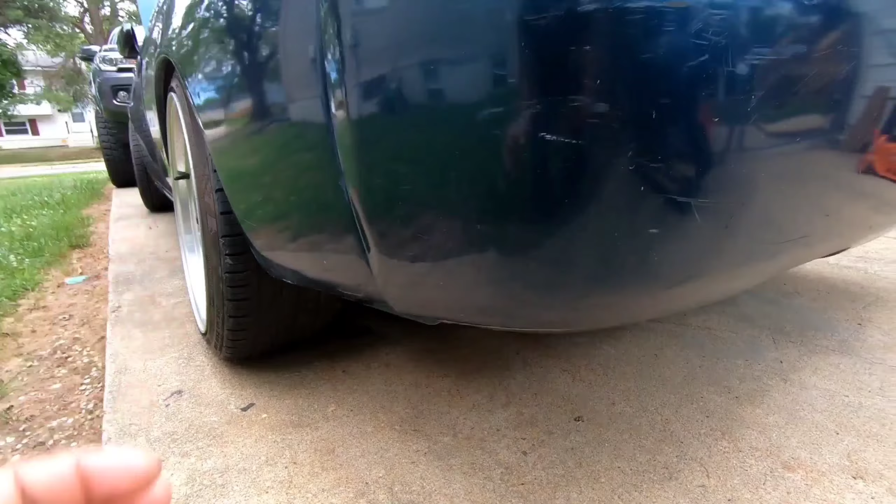All right, so back to the 240. I actually need to get this thing rolling already because I haven't touched this car in about a month, it feels like. But I'm gonna go ahead and work on getting the rear subframe out. Once I get the rear subframe out, drive shaft disconnected and all that good stuff, I can work on that, and then we'll focus on this engine.

I haven't put the front end back together yet just because I'm kind of unsure what I want to do as far as the bumper, getting it painted, getting it replaced. The lip is definitely getting painted. I've been dragging my feet on that, but it's getting done. But like I said, today we're going to worry about the subframe.

I want to get that subframe out, stripped down as good as I can, or scuffed up, then POR-15. I'm not powder coating it. I was considering it, but I'm just against that right now just because I don't want to have to deal with taking it anywhere and waiting on somebody else to get it done.

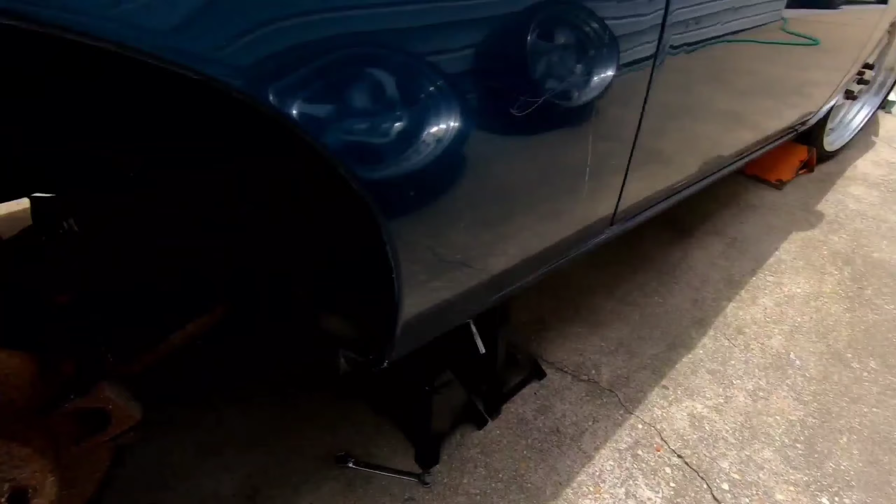All right, both wheels are off. We're going to have to disconnect this. Well, I already did it actually. This parking brake cable has come off because this caliper has come off. Should be free now. There we go. And you're not supposed to let this hang, but I don't care about this brake line or this caliper, so it's gonna hang. This is gonna hang out there. If I need to move it around more, I'll figure it out when I get underneath the car.

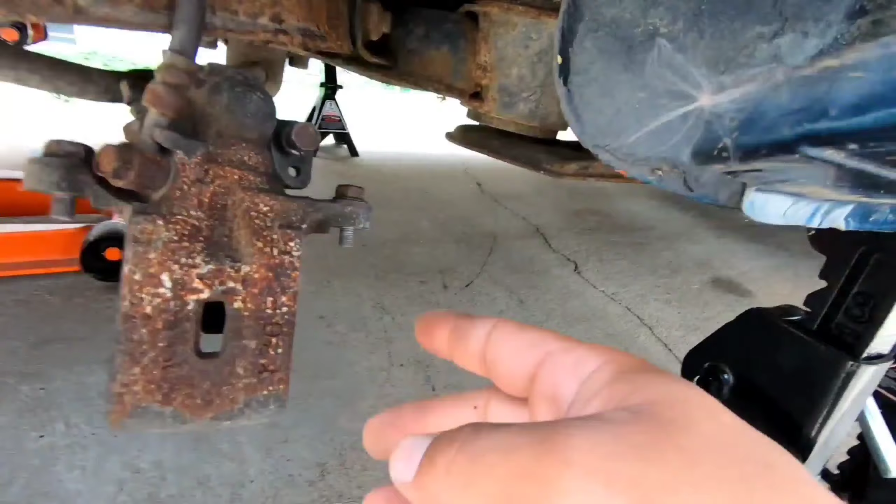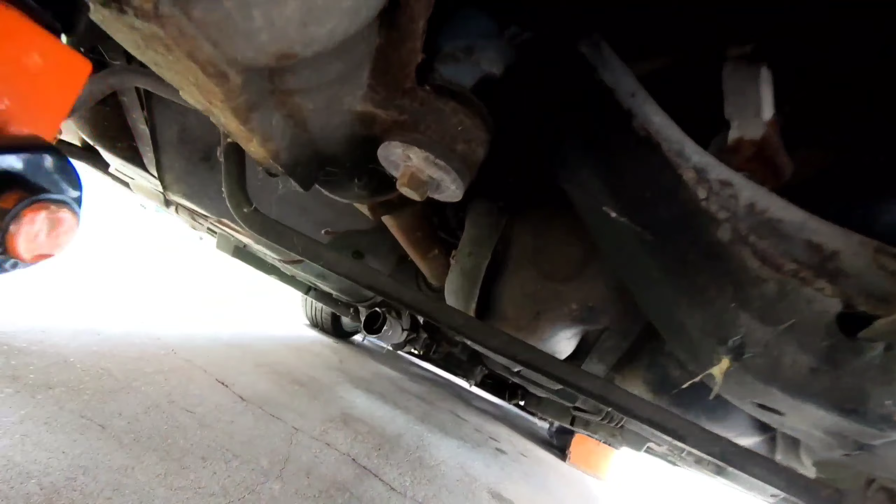But it should be this bracket right here, bolt in the rear, this one right here, and the same thing on the other side and up front, and then undo the shocks down here, and the whole thing should come down. Oh, and of course I have to disconnect the drive shaft up here, but we'll do that last. I'm gonna do everything else in the back first. And everything's juiced up.

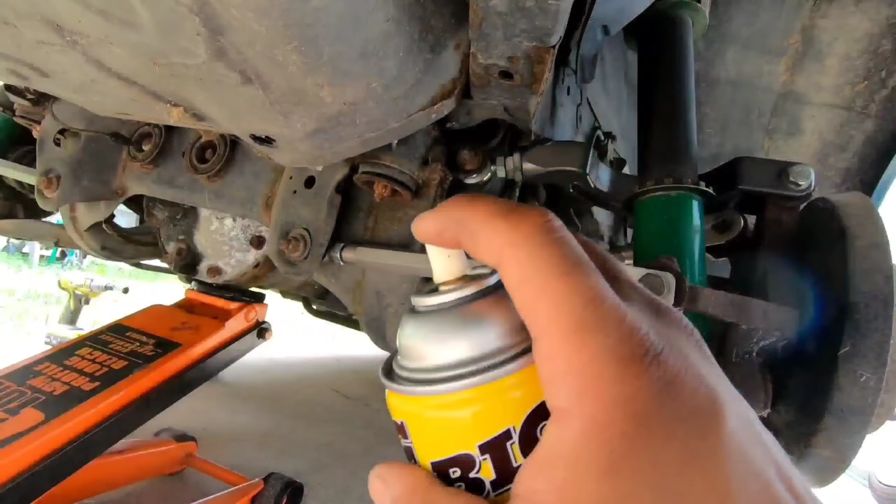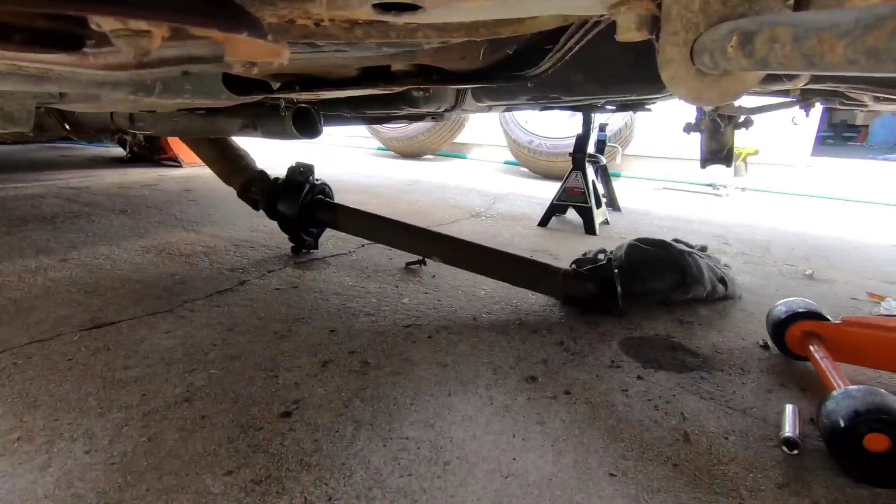Alright, so I lied. I pulled the drive shaft off because common sense. I'm not gonna be able to lower the subframe with the diff with the drive shaft still connected. So drive shaft's undone. Still got to disconnect it from the trans, but that's nothing I gotta deal with right now. And it's just like I said, these three right here, those three right there, that one, two shocks, and we're good. So I'm gonna go ahead and get those down now.

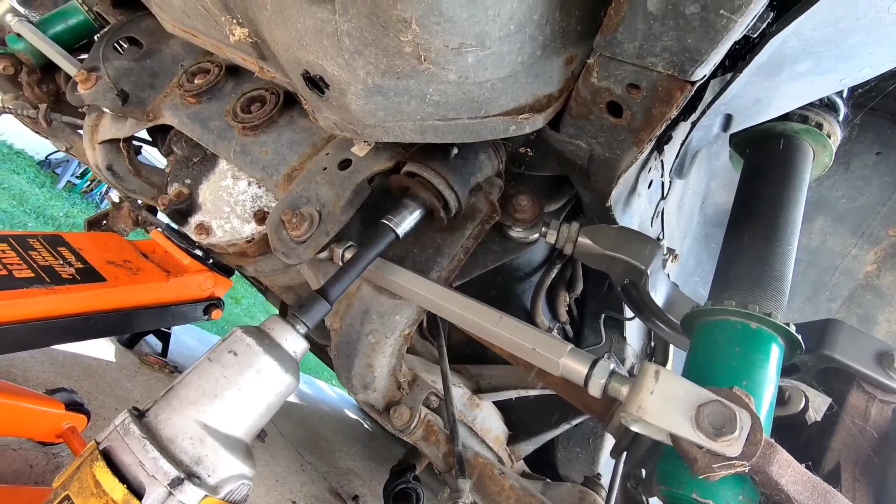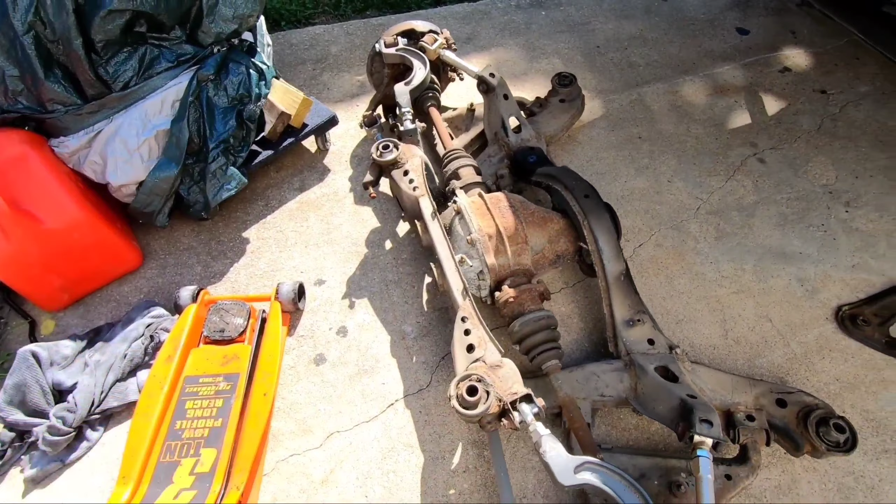So I got the subframe out. I think what I'm gonna do is I'm just gonna unbolt these arms and even the lower control arm. That way I can pull the whole hub assembly and all the arms away from the subframe itself. Pop these bushings out and get it cleaned up pretty good, and then I'm gonna go ahead and coat it.

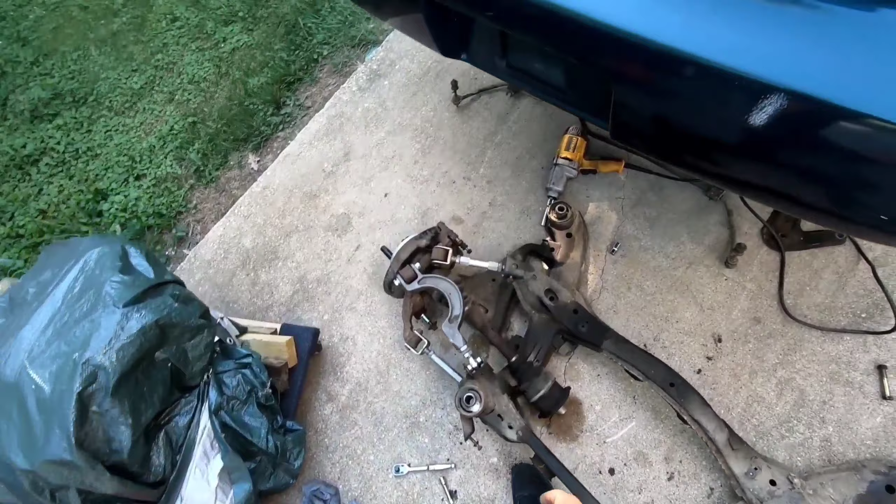So I got everything unbolted. Now this should technically just slide out. There we go, see? Just like that. Now I'm gonna do this side, and we can start working on the subframe.

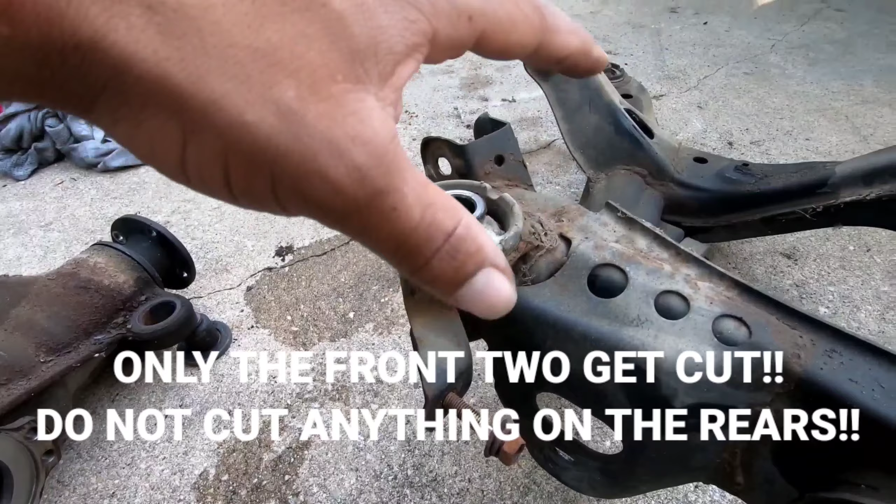All right, got everything cleaned up, but these actually have to be burned out. So I'm gonna grab the torch, heat them up, see how easily they burn out, and then I'll drill it out and then wire wheel it, and then the lip has to be cut off so you can fit the poly bushing in, because I did go with Energy Suspension poly bushings. I did not want solid on the subframe.

Going solid on a subframe is not necessarily a terrible thing, but I don't want that much NVH, which is noise, vibration, and harshness. I don't want to deal with all that because I do want to street drive the car a little bit. And the poly bushings are a little bit stiffer than stock, so they'll be good for what I want to do with the car. I don't see myself ever having to change them to go solid unless I want to do the G-Tech setup, which raises the subframe a little bit and gives the car a better center of gravity, I guess.

So as far as the instructions go, they're not really good. It says apply light heat evenly. There we go. Motherfucker.

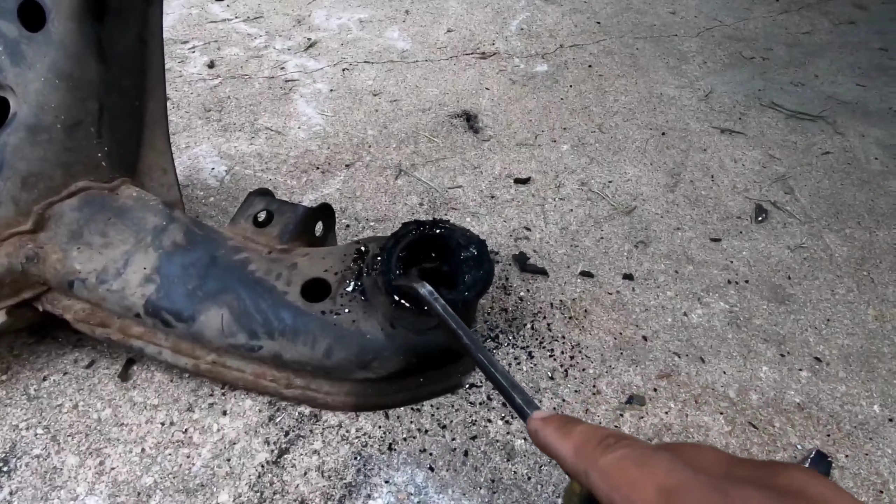Alright, after you let it heat for a while, you can bang out the bushing, and then you can just rub a lot of this stuff off. There's some caked up in there. Yeah, the rears are easy. You just wire brush out the little bit of rubber that's left over, and you're good.

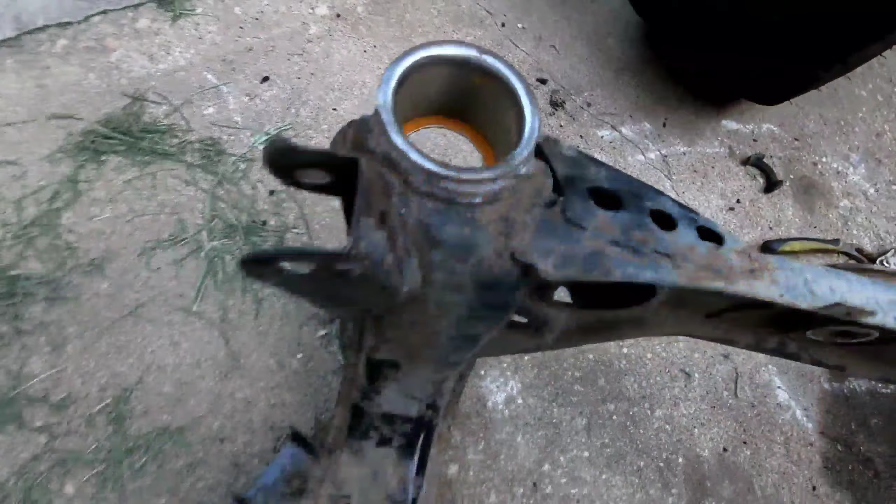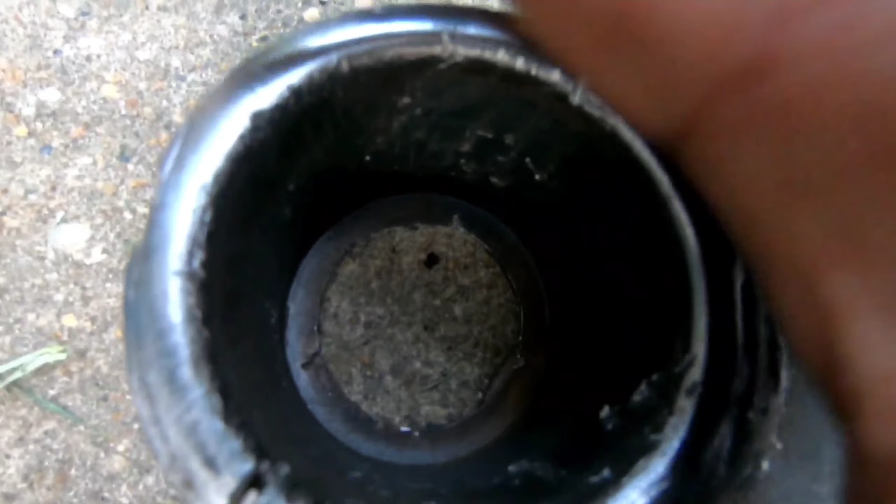The fronts have a shell that sits in here. So you've got to be careful not to take out this lip, because this lip is there to hold the bushing in place. That base has to stay there. And if you look, it'll look just like the rear ones.

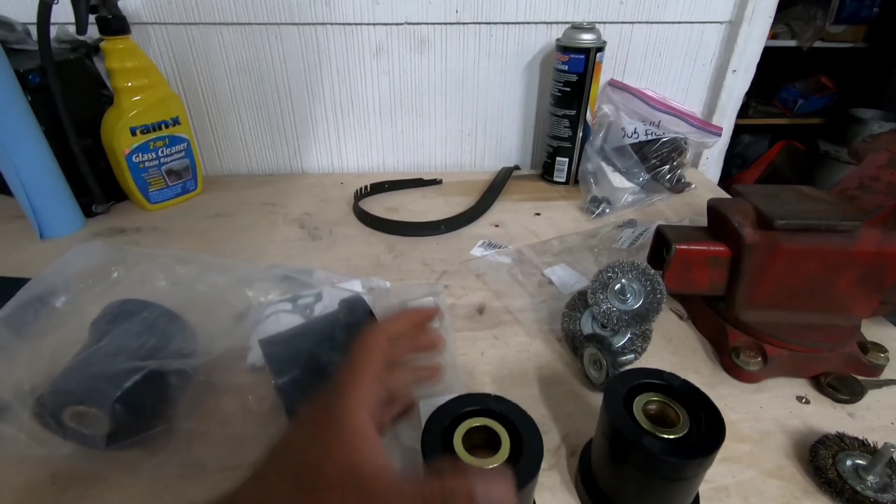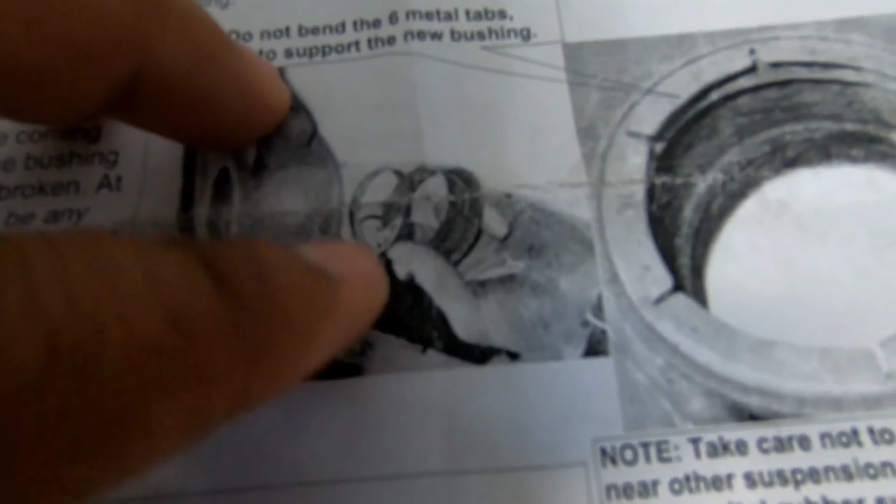So these are the Energy Suspension bushings, and as you can see, the front and the rears are all the same. My issue with these instructions is right here it shows one ring and then this other collar, and it's showing it as two separate pieces. Mine seem to have that as one piece, and it's connected, and the collar doesn't overlap the top of this. Mine actually curves in, and this bigger piece curves over this little piece, if that even makes sense.

So you can see that this little piece goes from top to bottom of mine, and then at the very top it curves over. It's not like a flat top. And on the bottom side, I don't have these 6 tabs. Mine's one complete piece. So that's why I don't mind making the slight notch in it to bang that sleeve up, because apparently some cars from the factory already have these notches in them. So mine might be different. Make sure yours isn't like this.

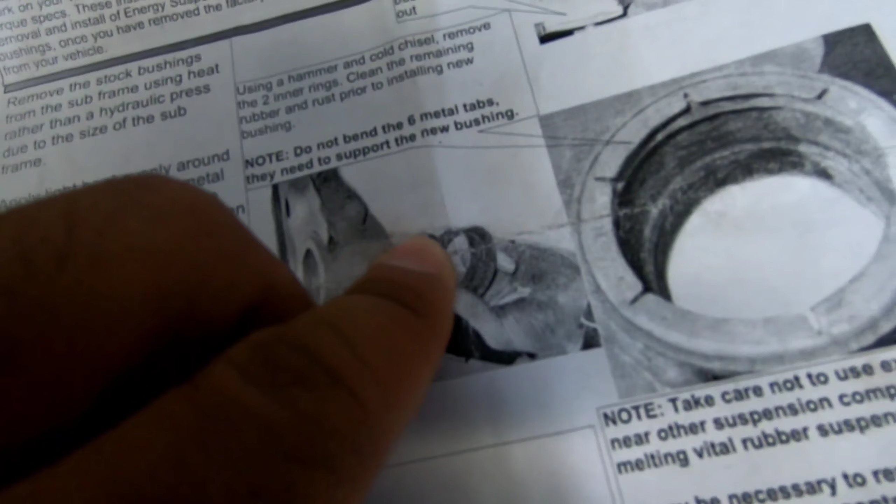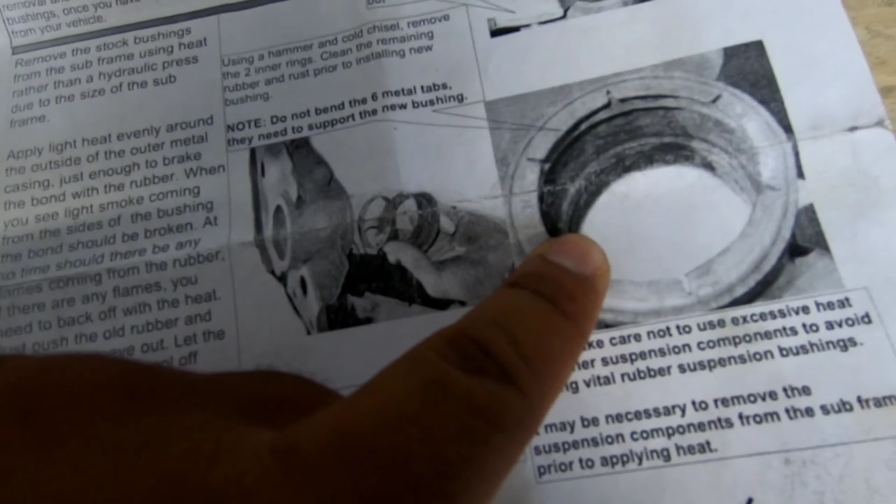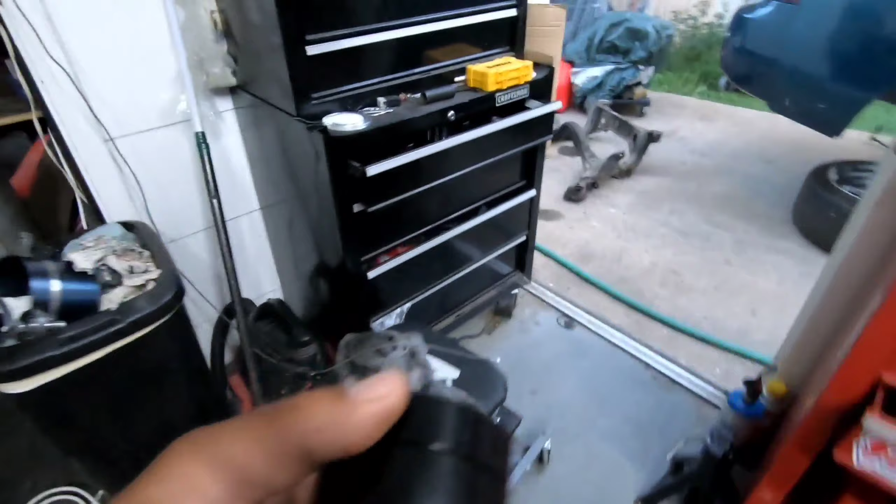There's another video out right now where it does seem to be this way, and it is an S14. So this says 95 to 98, and mine isn't like that. And mine's a 95 or 96. Regardless, mine's a Zenki S14, and it doesn't look like this one. It looks like what you guys have seen. But you do know that all 4 of them are the same size, and you need to get all 4 of these in, one in each hole.

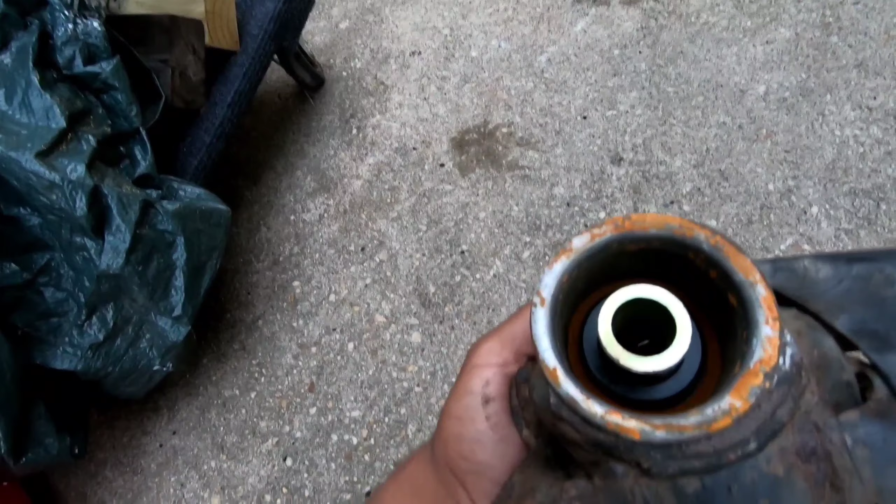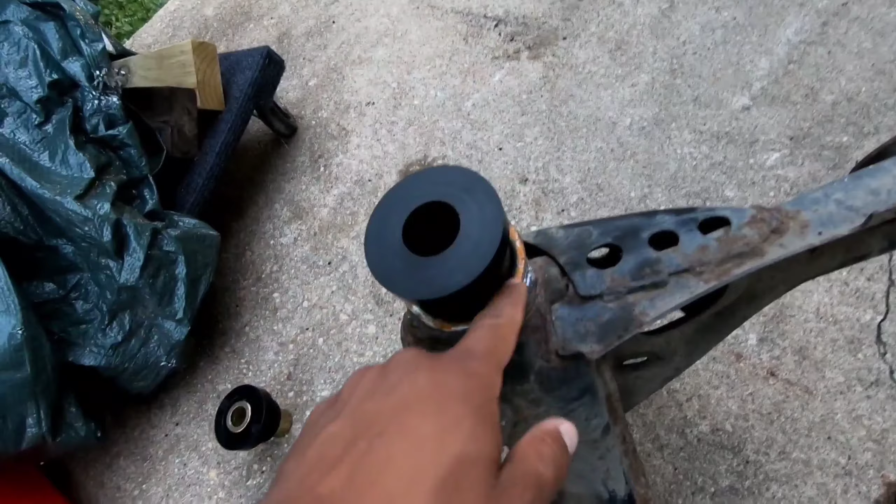So as you can see, this fits down here just fine, and it has a little bit of play in it, but that's fine, because once it slides into this one, which goes in here, this will fit in there. It's a snug fit. If you were to take the shell out, it wouldn't be as snug of a fit. Once you get this in there, it'll essentially fit over top of this one like that, and it'll be a snug fit. That's how it starts off.

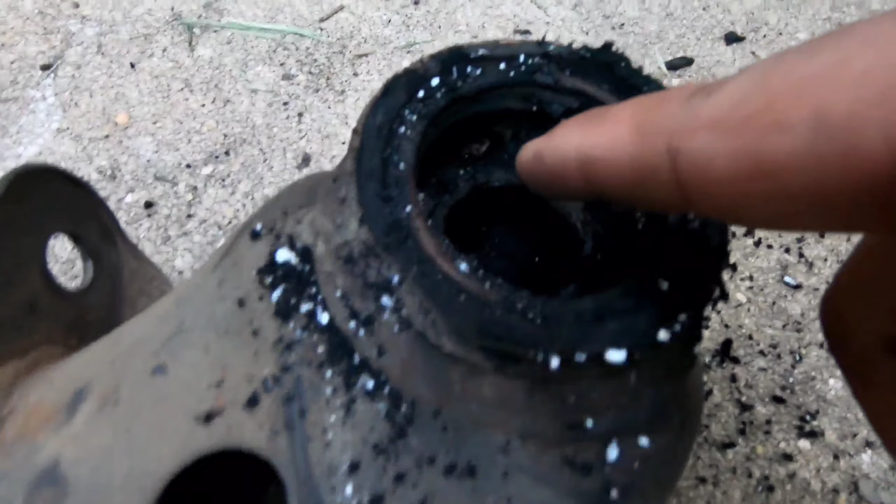Now there's a plastic ring in the center, then there's a metal ring, and then there's another metal cup that's sitting inside this entire shell. So what I'm going to do is get all this rubber off, wire wheel off a good amount of it, and then cut slits into this. I'm going to bang it in a little bit, then flip it around and cut a slit into the bottom, which is essentially this base. You can see there's a slit right here and right here. So I'm going to slit it from the bottom so I can bang it up from the bottom, because it has to come out through the top, not through the bottom. So that's what I'm going to do on this side now.

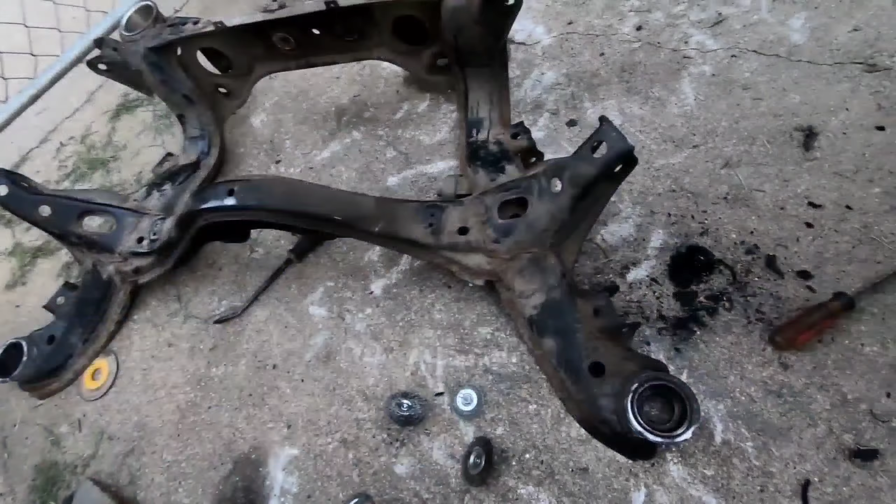Alright, so now you can see this is the plastic ring that needs to come out. It should be as simple as just banging on it. There's like a crack there, or not a crack, but that's the joint where it comes together. And it's just like that. You just tap it a few times and it'll bust it loose. You can pull it out.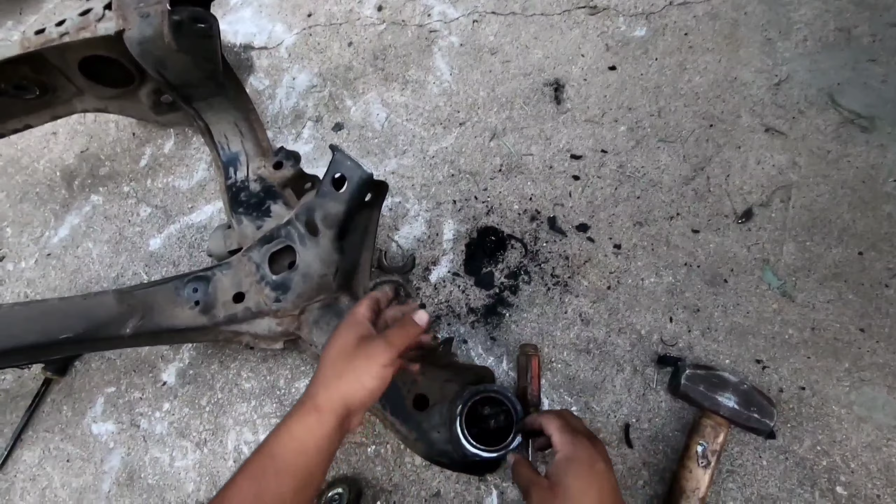Just like that. Not sure if you can see it, but this is the inside of the bigger shell, and this is the smaller one right here. That one's gonna have to come out first, but it's a bit of a pain because this one overlaps it. So I'm gonna slit it right here, and I'm gonna try to bang that one out first.

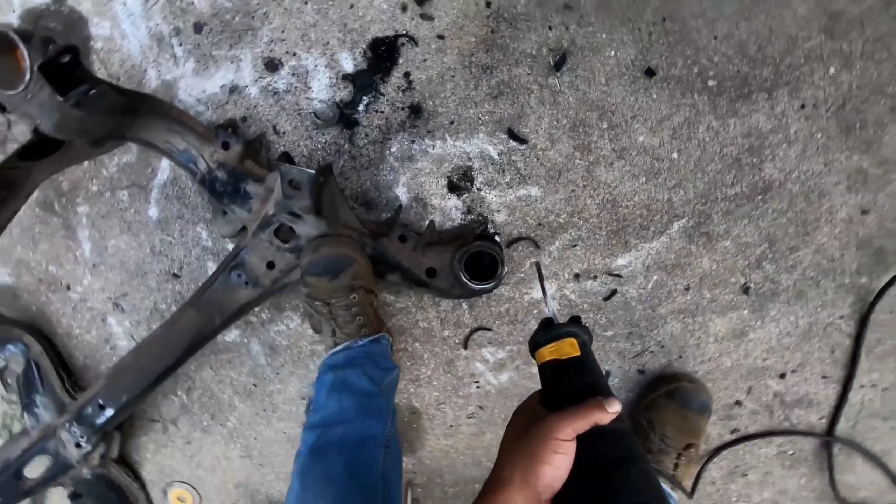All right, you can see already that this little piece of that inner shell just popped out. So that's what you want to do. I'm gonna slit the other side so the other side will pop out, and then we should be able to pop out the bigger pieces. There we go, it's already coming loose. Now we got the other half, the other part. Like I said, that one went right there, that one right there. So now what we got is this bigger section, and we should be able to start prying it out.

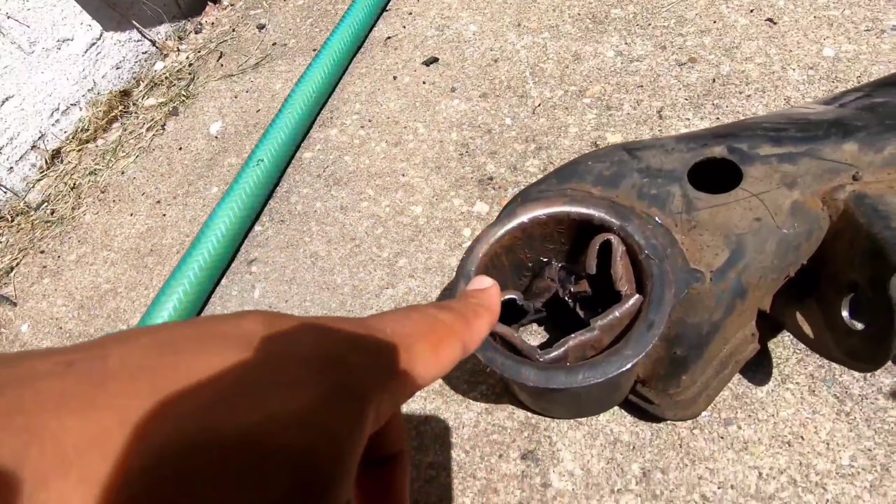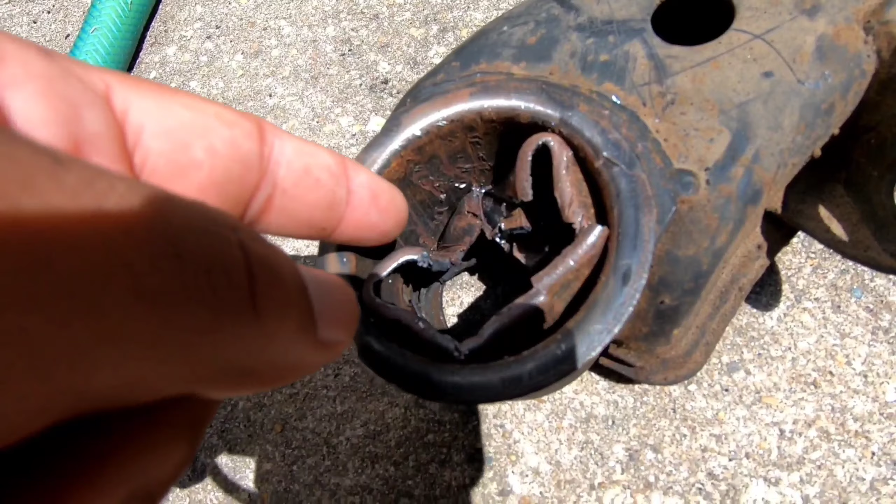Alright, so I had to continue this on to another day just because it was getting really dark, and I wanted to make sure you guys could see exactly what I was doing. So I know it looks a little mangled up, but basically I hammered in a flathead or a chisel all the way to the very bottom. And the reason I did that is because for it to get to the bottom, it has to push that shell inward. And when it pushes that shell inward, you can then see from the bottom the shell poking out, and you can hammer up on that part of the shell and it will start to come up.

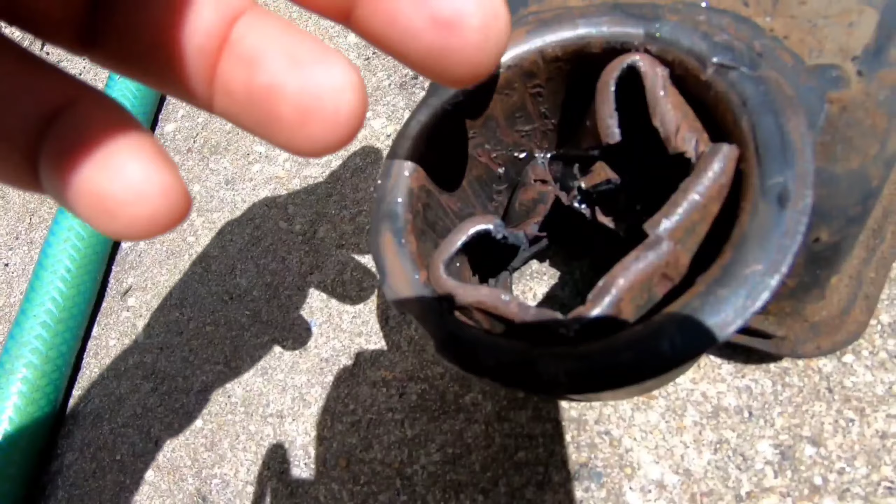So I got that far the other night, and then I left it alone, so when I had more daylight I could actually show you guys what it'll look like now. You probably don't have to bang it up this much, but I wanted to get it in and then cut out whatever was inside here. Like I cut as I hammered. So when I bent those tabs in, I cut it off, then bent a little more and cut a little more off. So you could probably get away without doing that, but it's just gonna get kind of crammed up in there, and you want to make sure you get whatever you're using to bang in here all the way to the bottom.

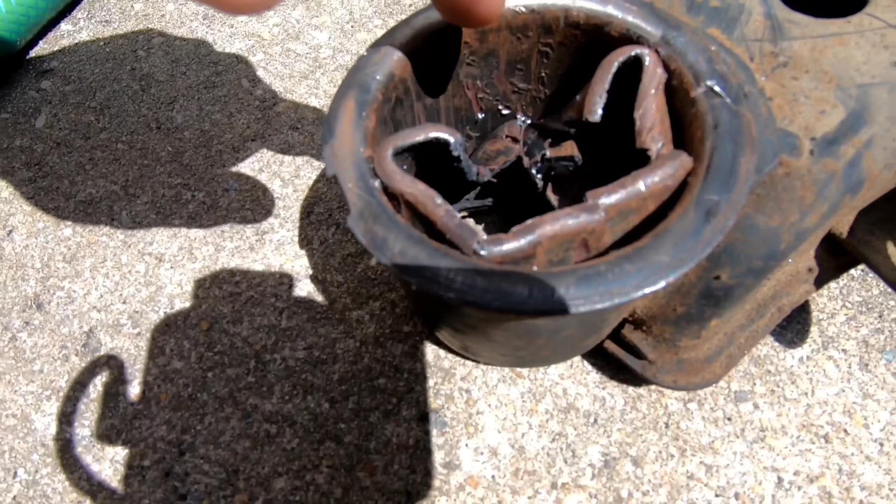Now if you get something in there, don't pry too much back and forth. Just kind of wiggle it out, because if you pry back and forth, you're gonna start snapping the tips off, unless you have some really strong shit. So if you have a really strong chisel or a really strong pry bar, it probably won't snap off. But both screwdrivers I used and one of my pry bars did break while doing this, so it's just a heads up so you don't break stuff. So now it should be as simple as me flipping this around and banging it out, and this shell will come up. So I'm gonna go ahead and flip it around and get that done now.

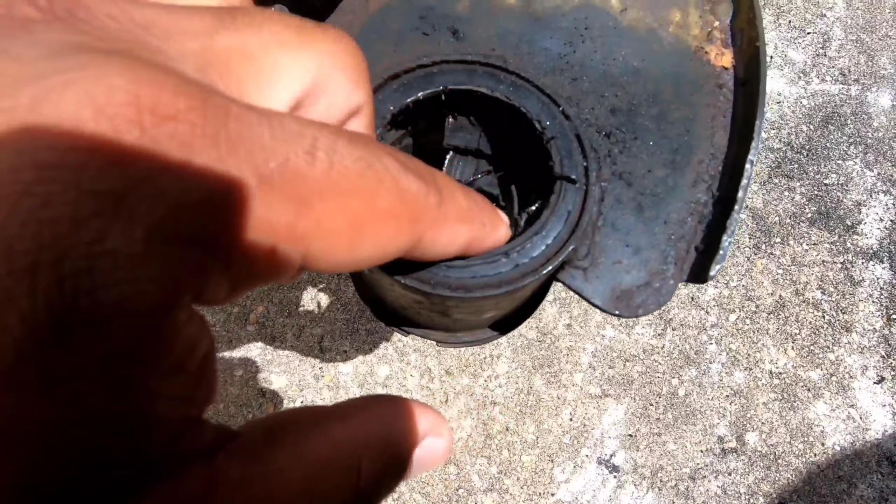So this is what I was talking about. You can see right here that inner shell is starting to push out this way. It also helps that I slit the bottom right here. Like I said earlier, if you slit this bottom, you'll weaken the bottom of this shell that's in here, and it'll give you room for it to pry out. So since I did slit it right there, it was able to bend easier so it could open up right here. Now, like I said, all I got to do is get something on this lip of it right here and bang it in, and this is the bottom of it. So when I bang it, this should go up and come out the top of the subframe.

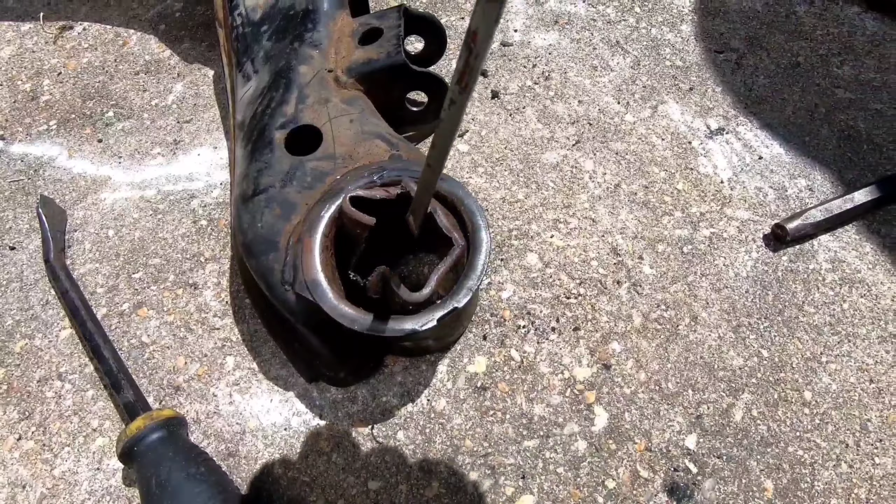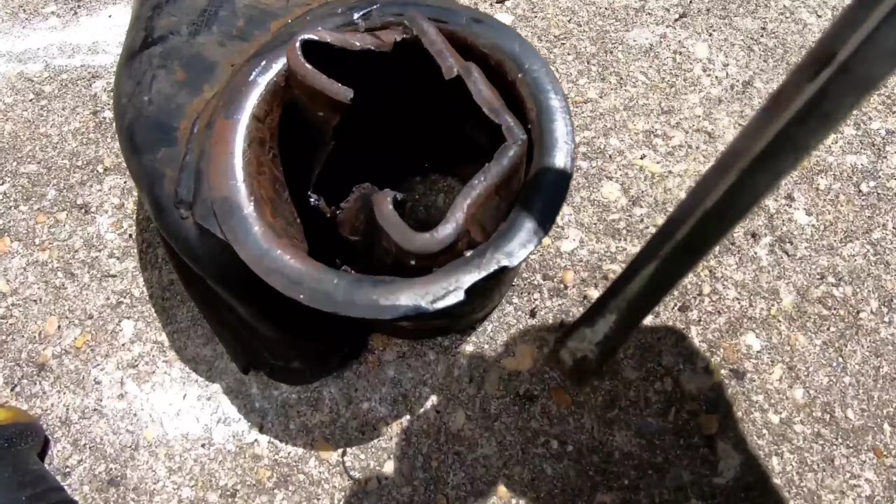So I went back to the top of it. I know this might seem like a lot of back and forth, but I went back to the top to actually bang it a little bit more, since we got that little ring in the center completely out, this one. So since we got that completely out, I did the same thing. I banged this until it bottomed out, banged it again until it bottomed out, and I went around the area that I had slit on the bottom side, and now you can see that it's opened up a little bit more. So I'm gonna go ahead and flip it over again so we can get that out.

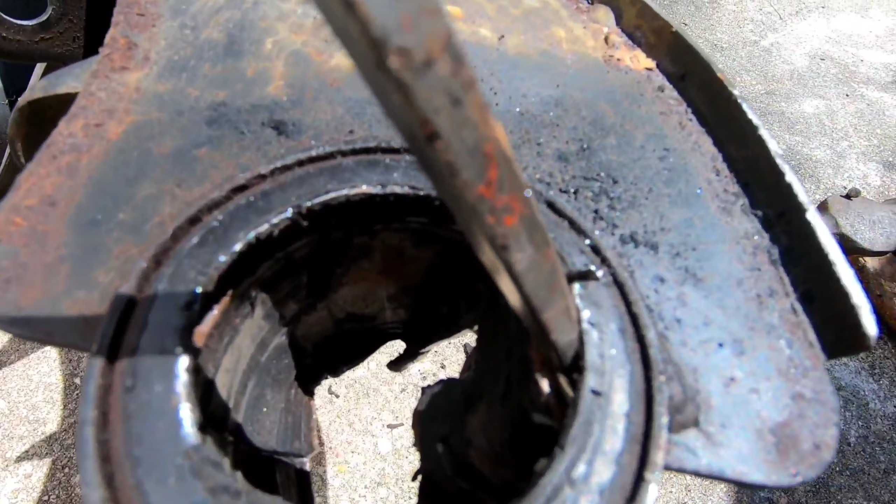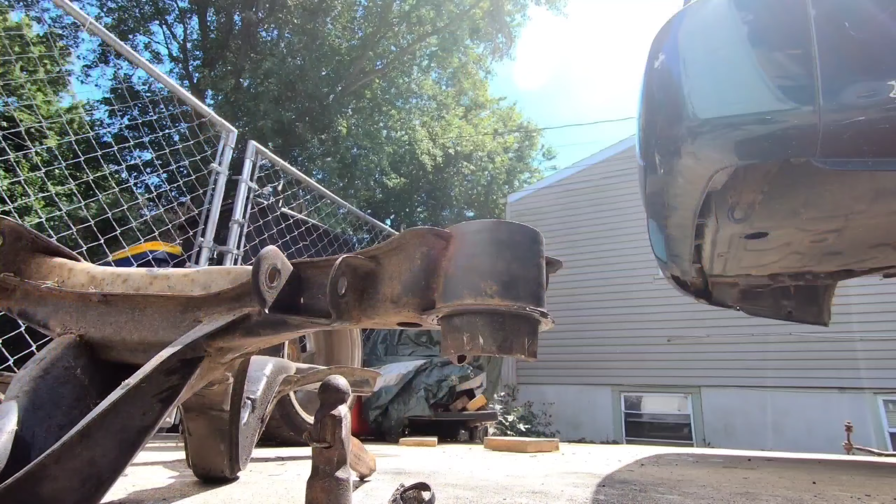All right, so this is what it looks like from the bottom. As you can see, I can fit this flathead up in there now, so you can see right through it. I actually gave it 2 little taps, and you can see that just went down in there compared to where it was before. So we have all this room now. You can see on the bottom side, that shell was about ready to fall out. So I'm just gonna sit the camera there, so you can see those few more taps are gonna get the rest of it out.

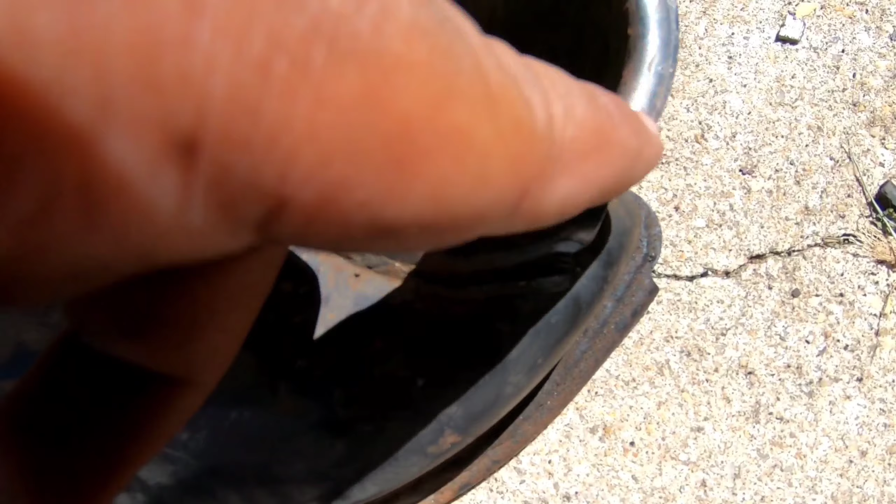And there you have it. The shell is out. Now I can flip this whole subframe back around, and you can see no cuts right here along the edge, because like I said, I kind of messed up when I did this one, but that's the right way to do it. Before I go ahead and put the bushings in, I'm gonna go ahead and clean the subframe up and POR-15 the whole thing, because I want it to be a gloss black. We're also gonna do the diff bushing.

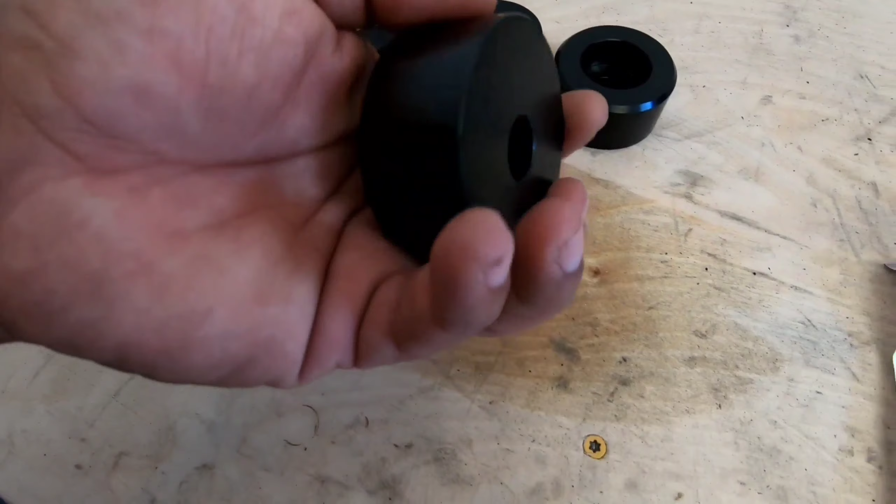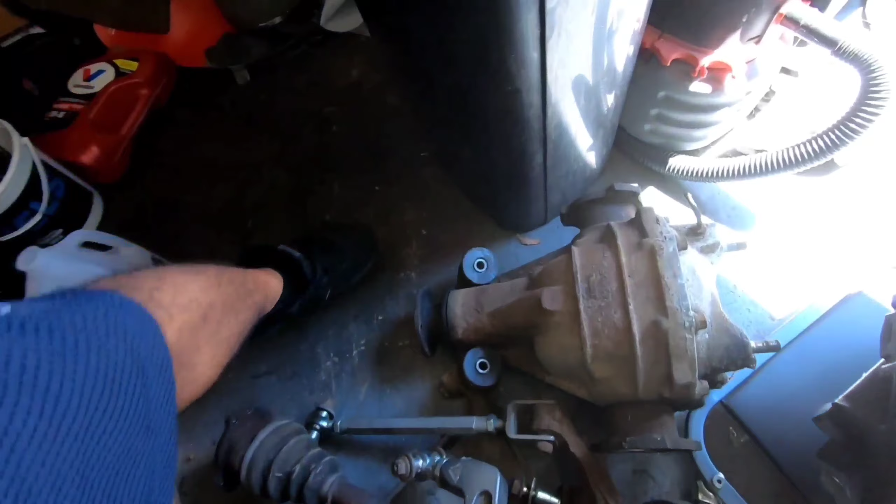So as far as diff bushings go, I have GK Tech bushings. So it'll be 2 for the ears and 2 for the diff cover mount. I'm guessing these are supposed to be self-explanatory, so I'm gonna go ahead and assume these go on the differential housing itself. So yes, this one will go in here or on the bottom like that, and you can get rid of these rubber bushings. So that's how these will go.

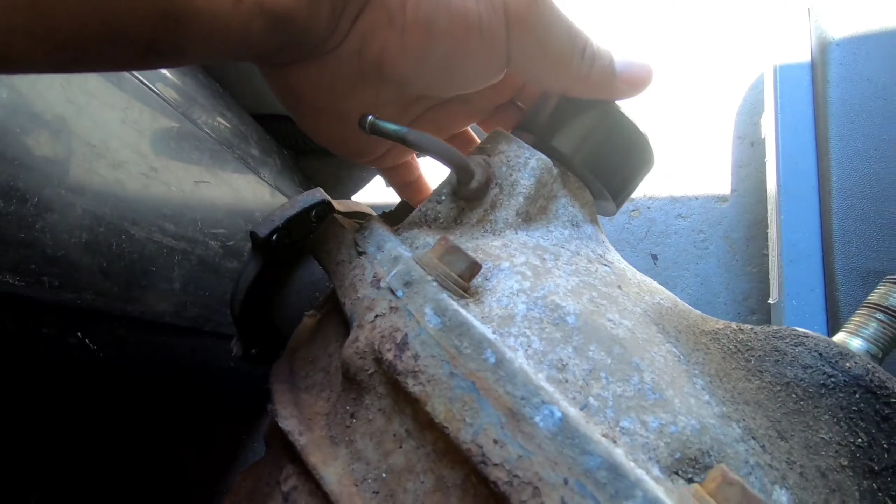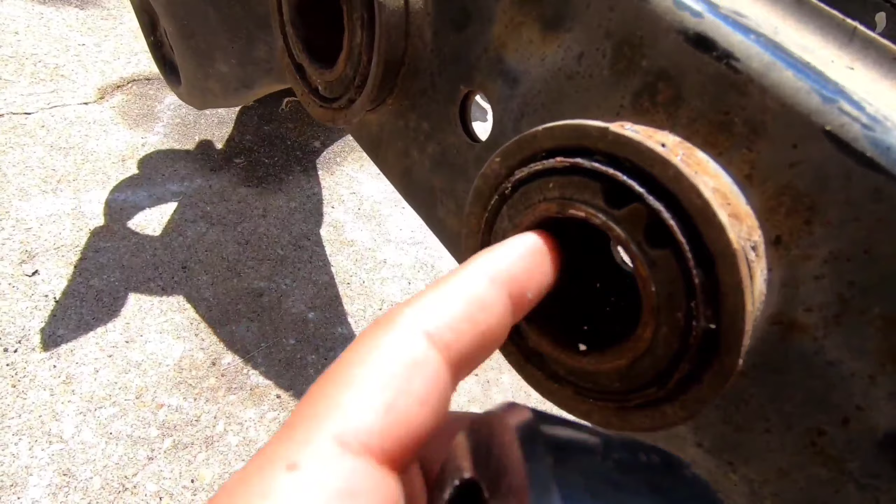And then the other one, this one, will actually go like that. I haven't looked into it completely, but I highly doubt it's gonna go like this. Pretty sure it goes like that. And yes, if you can see the way the factory one is set up, it is recessed on the inside, so this will go like that.

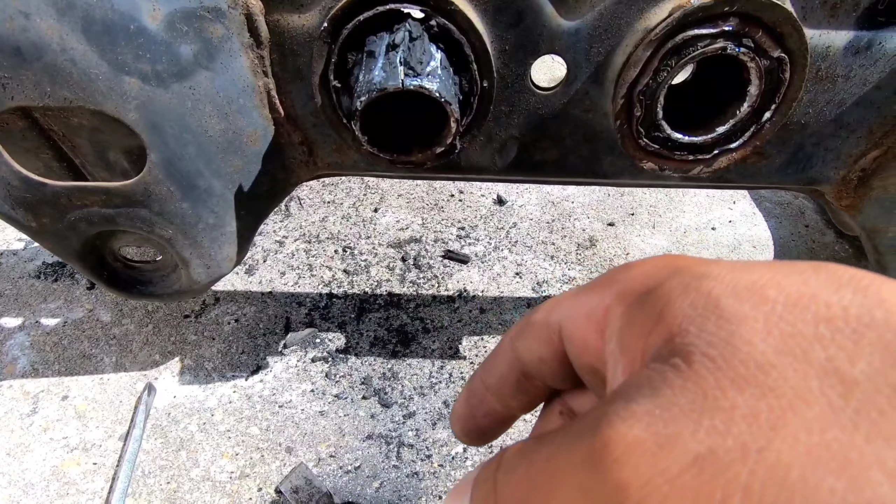Okay, so I ended up not being able to just crush this in and pop it out. They ended up being seized up in there, but I went ahead and just drilled a bunch of holes in the bushing around it, and then I hammered it out from the inside out. Ideally, a hole saw will be better, because it can just be one pass and loosen up the whole thing, and it should pop out easy. But I didn't have a hole saw, so I just drilled it out and started to pop it out. So now I should be able to pop this out, slit a hole in this with the Sawzall, and then pop this ring out, and then get on to cleaning this thing up.

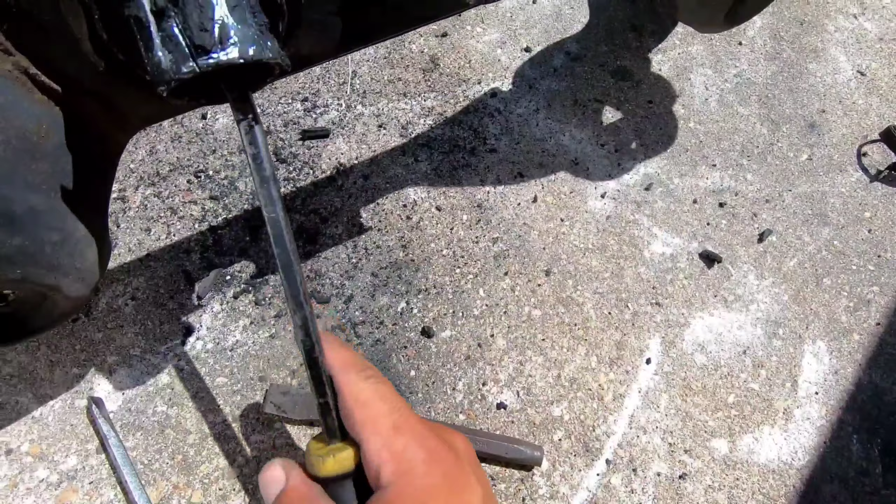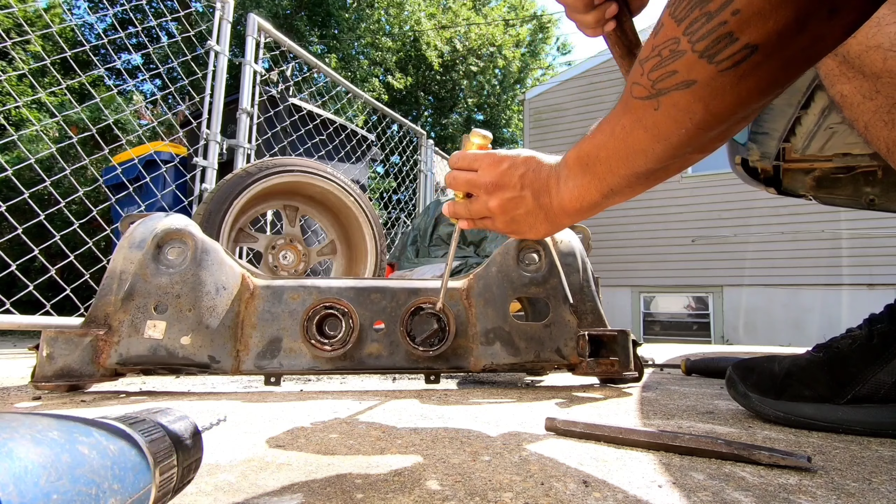Let's see if I can actually just pull this out. Yeah. There you can see it rotate.

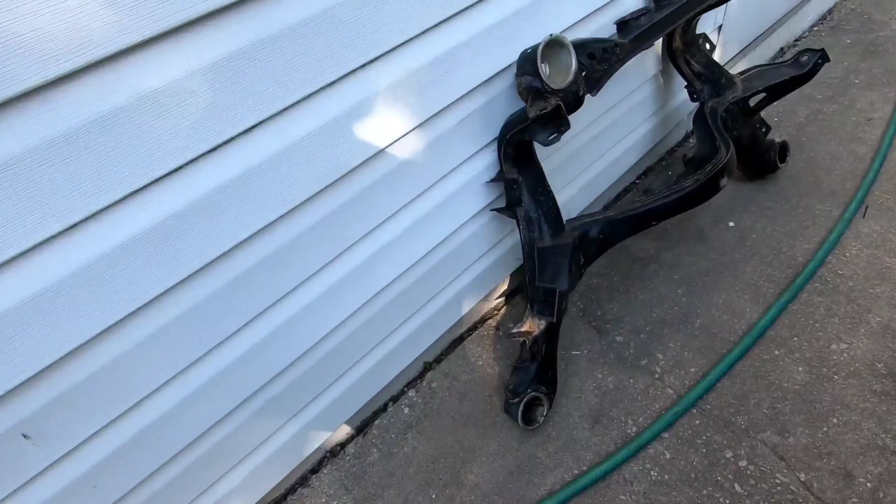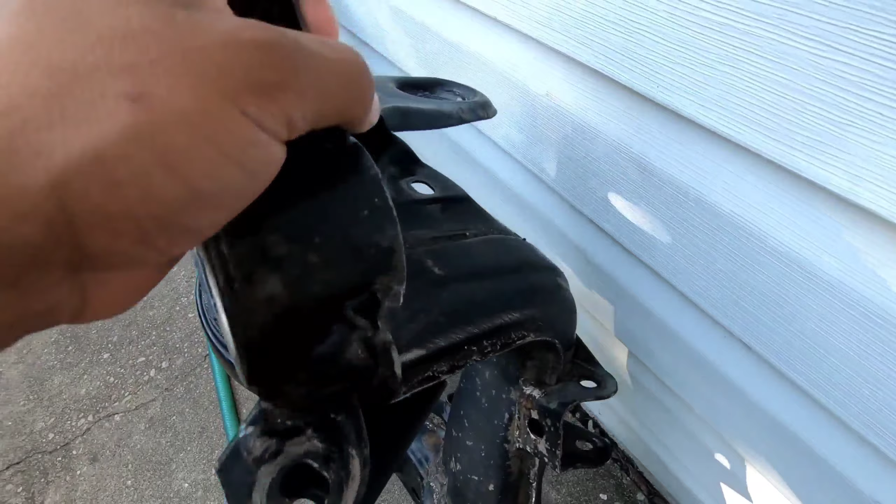And that's it. So you know how I said I'm not gonna get it powder coated, I want to POR-15 it because I want to be on my time and I want to get it done soon. Well, I'm getting it powder coated. About to drop it off now. I did clean it up a good bit to POR-15 it, but I'm just gonna have it sandblasted and powder coated. I don't want to come back to it and do it again. I kind of want it to look good and be done once. I know powder coating is probably a lot for this car and for a subframe in particular, but it is what it is. It's gonna get powder coated.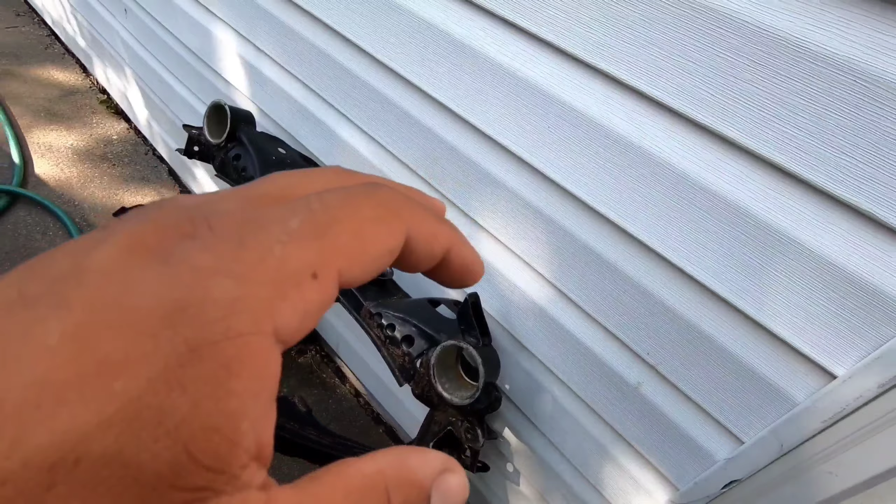And that definitely breaks up this video. So this video will be up. Next video we'll be putting this thing back in the car. I'm not entirely sure what color we're gonna go with. Originally I was just gonna do a satin black, but then obviously I considered the gloss black because it looked good. But we might try something different. I don't know yet. We're still up in the air what we want to do. So I'm gonna load this up in the truck, take it down to him. But that's gonna be a wrap for this video.

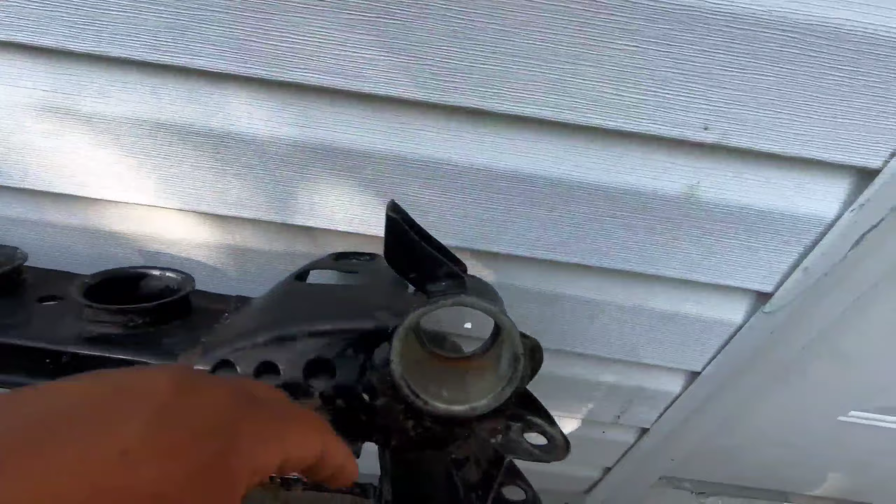So definitely come back and check the channel out again to see what we do with it color wise and how it ends up looking when it's all said and done. I'll definitely go over me putting in the bushings and everything else. That way I'm your guinea pig. It's been done before, but a lot of people just don't document it the right way, or they cut these out. We know for sure these bushings fit in good. We just gotta throw these diff bushings in and we're good.